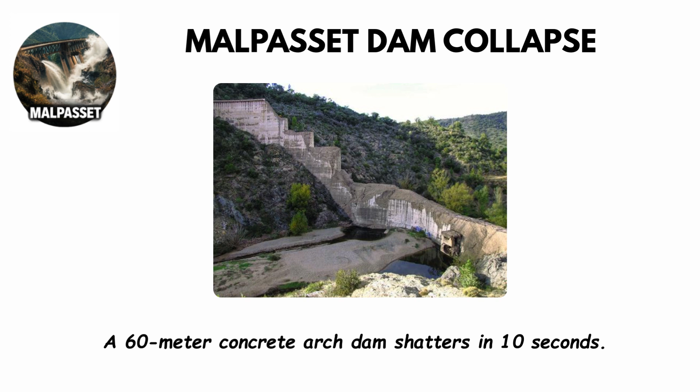The Malpasset Dam Collapse. December 2nd, 1959, southern France, 9:14 p.m. A 60-meter concrete arch dam shatters in 10 seconds. 50 million cubic meters of water explodes down the Reyran Valley at 70 kilometers per hour. The wave is 40 meters high, taller than a 13-story building.

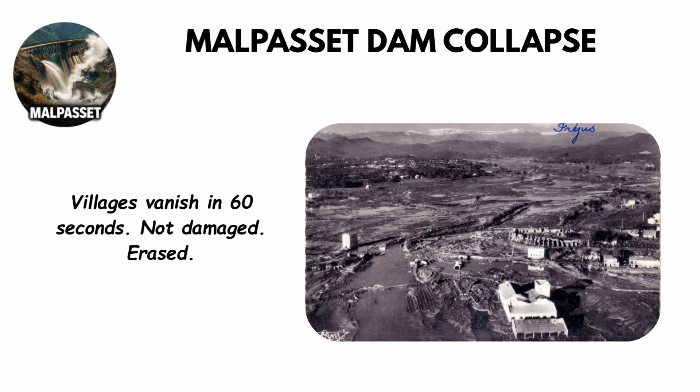Villages vanish in 60 seconds. Not damaged, erased. 423 people killed, 135 of them children. Many drowned in their beds, never knowing what hit them. The brutal twist? The dam's concrete was flawless. Engineers built a perfect structure on fractured gneiss rock riddled with faults.

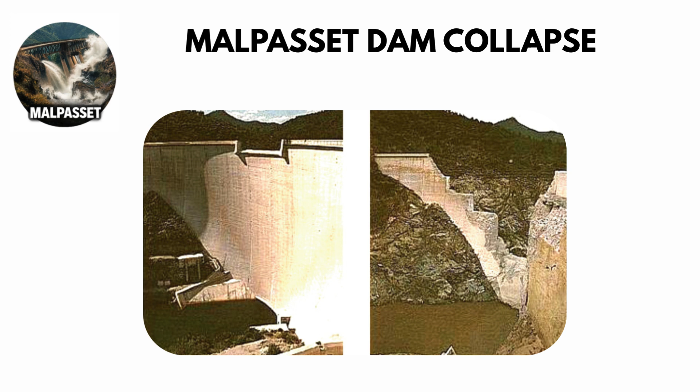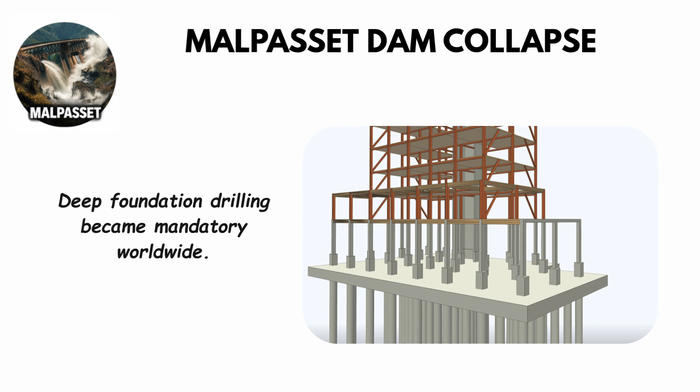Foundation investigation, inadequate. Geological surveys, superficial. Water pressure built beneath the base like a hydraulic jack until physics won. The dam worked beautifully, the geology didn't. After Malpasset, the rules changed forever. Deep foundation drilling became mandatory worldwide. Hundreds of test boreholes before 1 kilogram of concrete. The lesson? Perfect engineering on bad ground equals mass disaster.

The Vajont Mega Tsunami. October 9, 1963. Northern Italy, 10:41 p.m. 260 million cubic meters of mountain, Mount Toc, slides into a reservoir in 45 seconds. That's 350 times the volume of the Great Pyramid. Impact speed? Over 100 kilometers per hour. The water doesn't splash, it detonates. A megatsunami shoots 250 meters straight up, higher than a 70-story building.

The wave splits in two. One destroys villages upstream. The other, carrying 30 million cubic meters, surges over the 261-meter dam. Downstream, the wall of water is 140 meters high. Longarone, population 1,910, sits directly in its path. 10:43 p.m., the town exists. 10:47 p.m., it's gone. 4 minutes. Only 500 bodies recovered, the rest simply vanished. Total death toll, nearly 2,000 people.

The dam? Still standing today, completely intact, not even cracked. Engineers knew the mountain was moving, 3.5 centimeters per day for 3 years. They thought they could control it by lowering water levels. They tried to stop 260 million tons with a drainage valve. The investigation revealed fraud, ignored warnings, suppressed geological data. Vajont redefined engineering responsibility forever. You're not building a structure, you're redesigning an entire geological system. Ignore the environment, and physics sends the invoice written in lives.

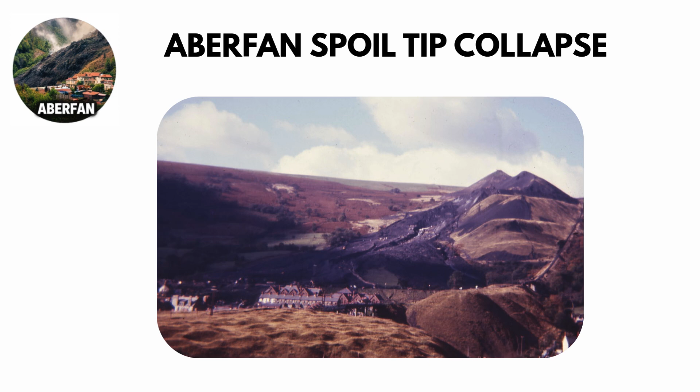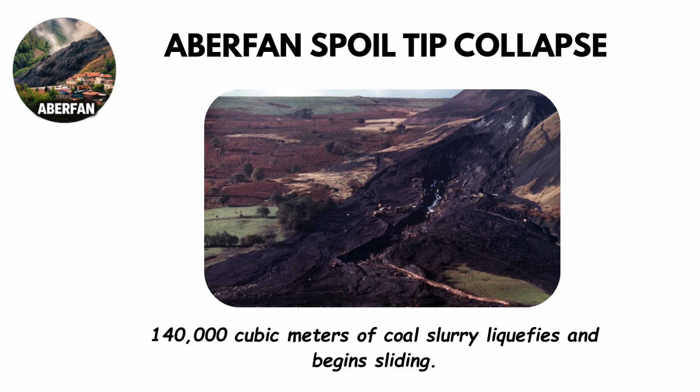The Aberfan Spoil Tip Collapse. October 21st, 1966, Wales, 9:15 a.m. Tip number 7. A 111-meter mountain of coal mining waste sits above Pantglas Junior School, built directly over underground springs, swollen with 2 weeks of rain. 140,000 cubic meters of coal slurry liquefies and begins sliding. Speed, 40 kilometers per hour down the hillside.

At 9:17 a.m., 2 minutes after movement starts, it hits the school. A 5-story wave of black sludge smashes through the rear wall. Classrooms fill instantly. Children buried under 12 meters of waste. Miners, many of them fathers, dig with bare hands. 28 children pulled out alive in the first hours. After that, hope dies with every hour that passes. Final count? 144 dead, 116 of them children aged 7 to 10.

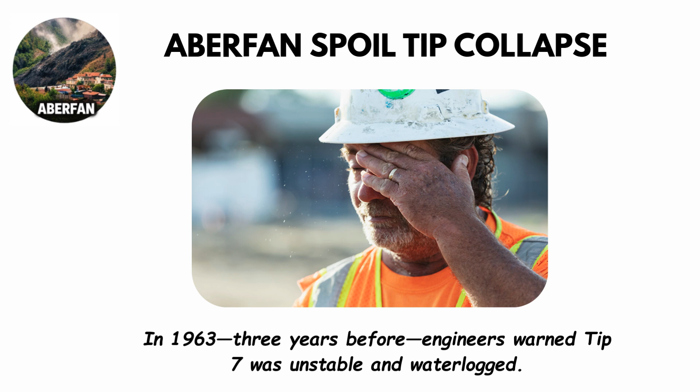This wasn't an accident, it was documented negligence. In 1963, 3 years before, engineers warned Tip 7 was unstable and waterlogged. Recommendation: stop using it immediately. Action taken? None. Coal production continued, the tip grew higher. Warnings ignored. Aberfan forced Britain to overhaul mining waste regulations completely. It established a legal principle. Ignoring known hazards isn't negligence, it's culpability. The 116 children are buried together in 2 long rows. They were learning arithmetic that morning.

They never went home. Turkish Airlines Flight 981, March 3, 1974, 12:40 p.m. Flight 981 climbs through 11,500 feet after leaving Paris. 346 people aboard. Destination, London. Then the rear cargo door, improperly latched due to a design flaw, blows out. Explosive decompression at 500 miles per hour. The cabin floor collapses downward, severing 6 critical flight control cables beneath it.

Pilots lose control of elevators, rudder, engines, everything, in 2 seconds. The aircraft pitches into a 20-degree nose-down dive. Speed, 800 kilometers per hour. Trajectory, uncontrollable spiral. At 12:41:50, just 77 seconds after door failure, it slams into Ermenonville Forest. Impact so violent the largest intact debris piece is 4 meters long. 0 survivors. 346 people dead.

Here's the nightmare. This exact failure happened before. 2 years earlier, American Airlines Flight 96 had the same door blow out. They landed safely. Investigators found the design flaw, recommended mandatory fixes for all DC-10s. McDonnell Douglas issued a suggestion, not a requirement. Airlines could ignore it. Turkish Airlines did. Modification cost, $10,000 per aircraft. Cost per life saved, $28.

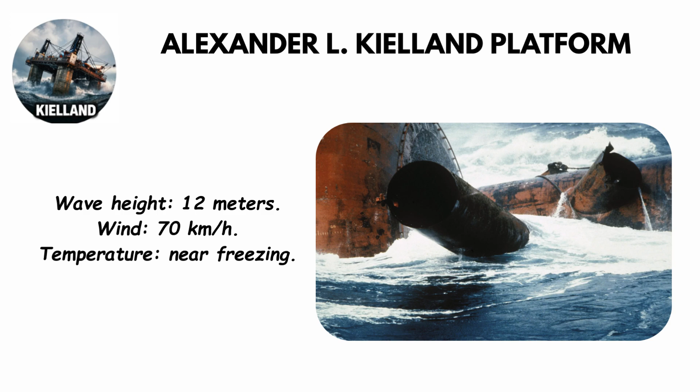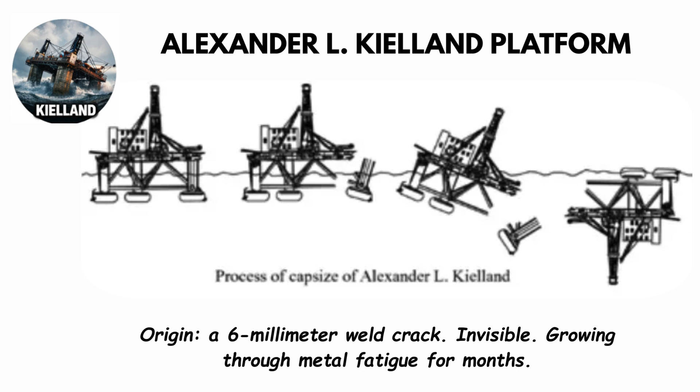The Alexander L. Kielland platform capsized, March 27, 1980, North Sea, 6:27 p.m. 212 oil workers on a 5-legged semi-submersible platform, 320 kilometers offshore. Wave height, 12 meters. Wind, 70 kilometers per hour. Temperature, near freezing. A diagonal support brace, 6 meters long, several tons, suddenly fractures and breaks off. Origin, a 6 millimeter weld crack, invisible, growing through metal fatigue for months.

Platform tilts 30 degrees in 15 seconds. Anchor cables snap. Tilt accelerates, 35 degrees, 40 degrees, 45 degrees. At 6:30 p.m., 3 minutes after initial failure, the platform capsizes completely. Workers trapped inside, now underwater in pitch darkness. Of 8 lifeboats, only 1 deploys successfully.

Others jam or crush. Survivors jump from 40 meters into 2 degrees Celsius water. Hypothermia window, 15 minutes. 123 people killed. 89 survived. The crack started at a small welded sonar mount on the brace.

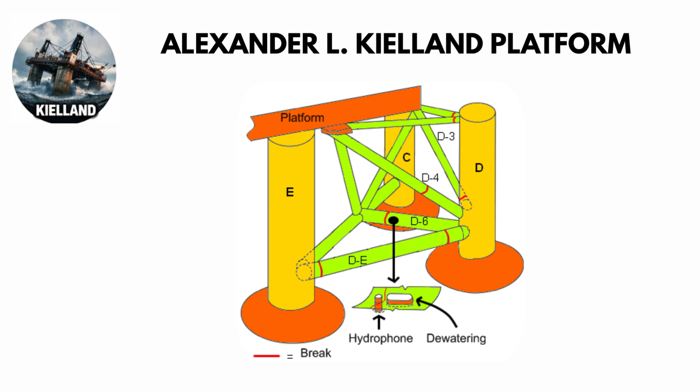Kielland transformed offshore engineering. Fatigue analysis, mandatory. Weld quality standards, completely overhauled. Damage tolerance, design requirement, not afterthought. In harsh environments, invisible damage is always growing. If you can't inspect it, you can't trust it.

The Val di Stava tailings dam collapse. July 19, 1985, northern Italy, morning. 2 earth dams above Stava village store mining waste, mud, sand, water. Raised higher and higher for years without proper reinforcement. Drainage, inadequate. Monitoring, minimal. Warnings, ignored.

The upper dam fails. Released slurry hits the lower dam seconds later. Both collapse simultaneously, unleashing a fast-moving wall of mud and debris. Speed, racing down the narrow valley like an avalanche. Everything in its path, homes, hotels, bridges, obliterated. 268 people killed. An entire community ceases to exist in minutes.

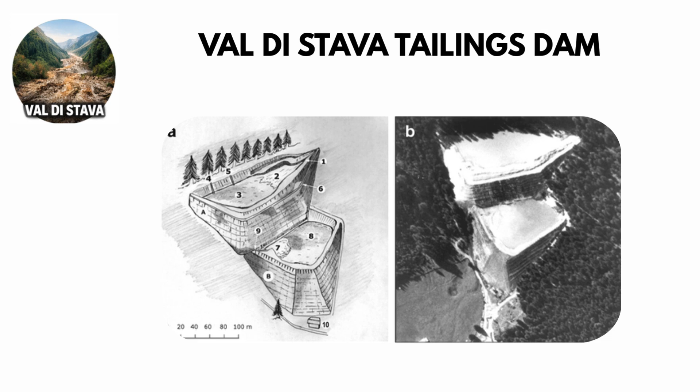This wasn't a freak accident. It was chronic regulatory failure, poor design geometry, 0 independent oversight, years of warning signs dismissed. Val di Stava became one of the world's most studied tailings disasters. It proved these structures aren't passive. They're living systems demanding constant control. Raise them without engineering discipline, and they become weapons.

The Chernobyl reactor explosion. April 26, 1986. 1:23 a.m. Chernobyl nuclear power plant, Ukraine. Operators attempt a safety test under unstable reactor conditions. Design flaws combine with procedural violations. Power surge goes critical. The reactor explodes. The core destroyed. Graphite fire burns for days.

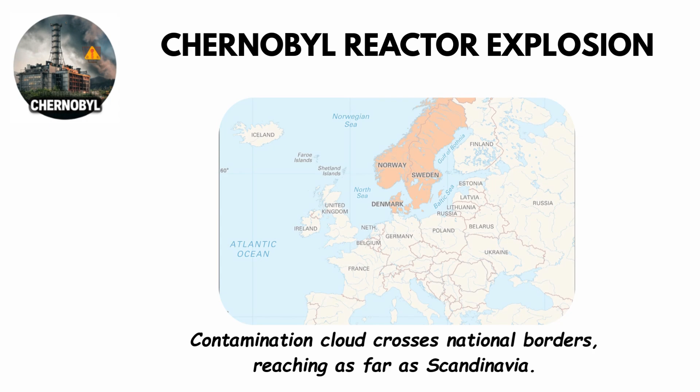Massive radioactive release spreads across Ukraine, Belarus, much of Europe. Contamination cloud crosses national borders, reaching as far as Scandinavia. Firefighters rush in without understanding the lethal radiation. Many absorb fatal doses within hours. Nearby residents not warned immediately. Evacuation comes too late for thousands.

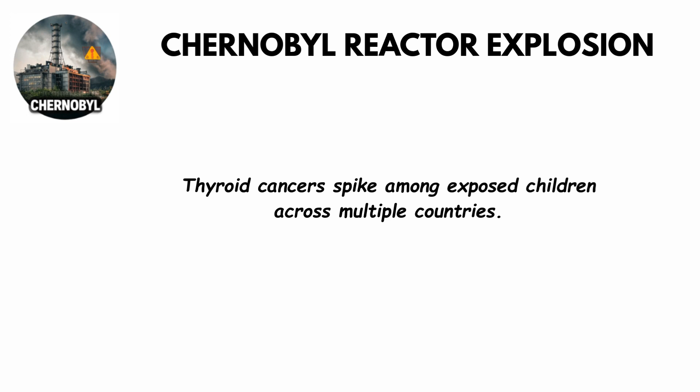Short-term deaths, dozens. Long-term health effects, thousands. Thyroid cancers spike among exposed children across multiple countries. Chernobyl wasn't a single failure, it was systemic collapse, design vulnerability, operational pressure, weak safety culture, secrecy, all converging at once.

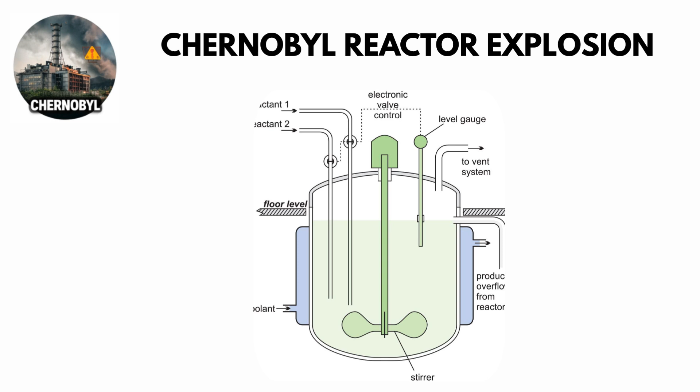The disaster transformed nuclear engineering worldwide. Reactor designs fundamentally altered, safety culture revolutionized, international nuclear standards completely rewritten. It proved complex systems fail catastrophically when transparency is suppressed, and radiation doesn't respect borders, politics, or lies.

The Piper Alpha Platform Disaster, July 6, 1988, North Sea, 10 p.m. Piper Alpha, an oil production platform, is undergoing routine maintenance, a safety valve removed from a condensate pump, work unfinished by shift change, communication breakdown, the night crew doesn't know. They restart the pump, pressurized gas escapes.

First explosion ignites fires so intense they melt structural steel. Pipelines rupture, feeding more fuel directly into the inferno. Emergency systems fail. Escape routes cut off. Workers face a choice, burn alive or jump 50 meters into the sea. Many jump from heights that make survival impossible.

By morning, 167 dead. Investigation reveals systematic safety management collapse. Poor communication, flawed permit-to-work systems, platform design that allowed fire to overwhelm critical systems within minutes.

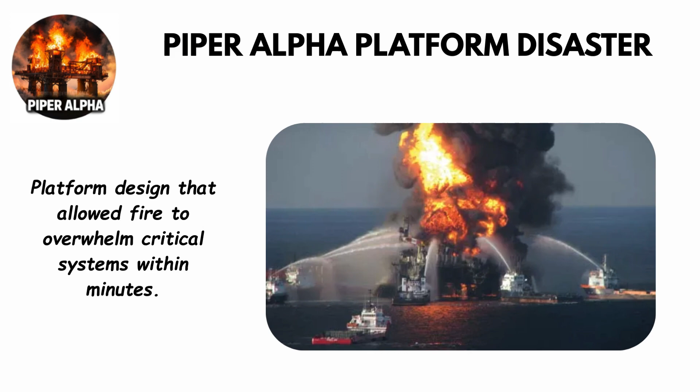Piper Alpha permanently transformed offshore safety regulation. Hazard management became priority one. Production speed became secondary. It proved that paperwork errors can become physics when explosive energy is involved. A missing permit note, a conversation not had. 167 people dead.

The sinking of the MS Estonia, September 28, 1994, 1 a.m., Baltic Sea. MS Estonia, a roll-on, roll-off ferry, crosses rough seas en route to Stockholm. Loud impacts heard from the bow. The bow visor fails under wave loads. It wasn't designed to withstand forces it was experiencing.

Water floods the vehicle deck rapidly through the open bow door. The ship develops a severe list and capsizes within an hour. Passengers trapped below deck in darkness, freezing water, violent weather. 852 people die. It's one of Europe's worst maritime disasters.

The failure revealed fundamental design vulnerability in ro-ro ferries. Once water enters the vehicle deck, free surface effect destroys stability instantly. Capsizing becomes inevitable. Structural weaknesses compounded the problem.

Estonia forced sweeping changes in passenger ship safety across Europe. New stability requirements, bow door locking systems redesigned, evacuation procedures completely overhauled. It remains a brutal reminder. Ship design that looks safe on paper can kill hundreds when physics takes over.

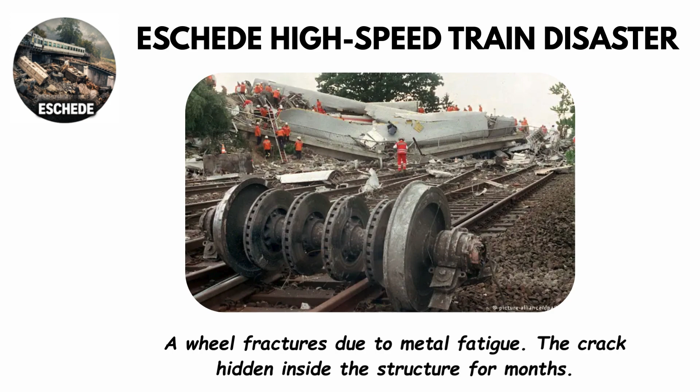The Eschede high-speed train disaster, June 3, 1998, northern Germany. Speed, 200 kilometers per hour. ICE high-speed train racing through the countryside. A wheel fractures due to metal fatigue. The crack hidden inside the structure for months. At full speed, the wheel disintegrates.

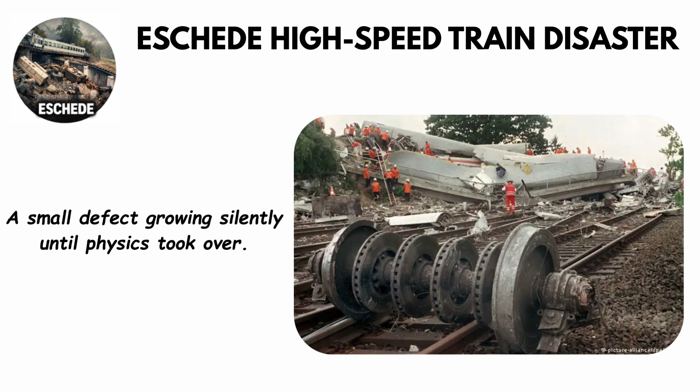Train derails and slams into a concrete overpass at 200 kilometers per hour. The bridge collapses onto the passenger cars below, crushing them instantly. 101 people killed, dozens severely injured. This wasn't a collision. It was fatigue failure, a small defect growing silently until physics took over. No warning, no time to react.

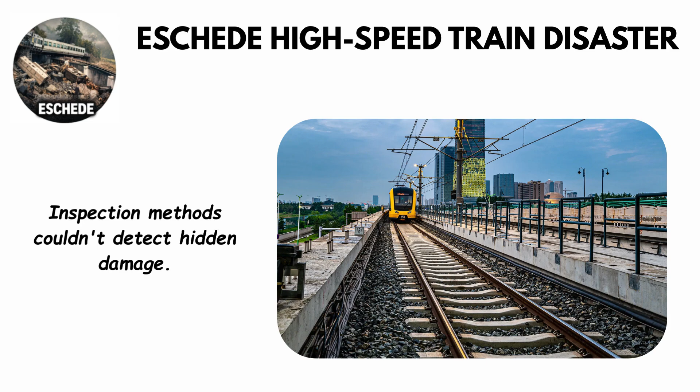Eschede exposed critical limitations in early high-speed rail systems. Inspection methods couldn't detect hidden damage. Engineers underestimated how quickly defects progress at extreme speeds. The disaster transformed rail engineering across Europe. Wheels completely redesigned. New monitoring systems deployed. Inspection regimes made far more rigorous. At 200 kilometers per hour, small errors leave zero margin. Fatigue doesn't announce itself. It just kills.

The Mont Blanc Tunnel Fire, March 24, 1999. Deep beneath the Alps, a truck catches fire inside the Mont Blanc road tunnel. Vehicle fire escalates into a tunnel-wide inferno within minutes. Smoke fills the confined space. Temperatures exceed 1,000 degrees Celsius. Drivers trapped behind the burning truck have nowhere to escape.

Ventilation systems struggle. Communication fails. Rescue teams blocked for hours. 39 people die, most from smoke inhalation, not flames. The tunnel itself became the death trap. Limited fire compartmentation, inadequate emergency refuges, ventilation not designed for modern fire loads.

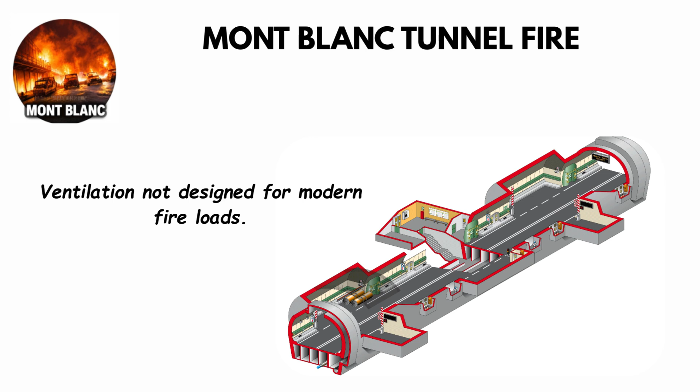Mont Blanc forced a complete rethink of tunnel safety across Europe. New standards for fire detection, ventilation control, emergency response. Emergency exits spaced closer. Fireproof refuges mandatory. Underground infrastructure offers no forgiveness. In a tunnel, smoke doesn't just kill, it hunts.

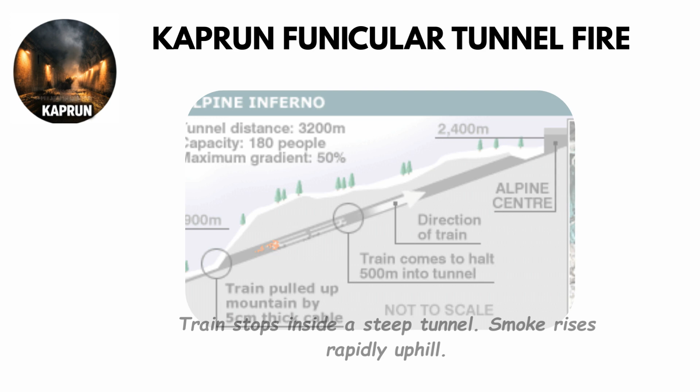The Kaprun Funicular Tunnel Fire, November 11, 2000, Kitzsteinhorn Mountain, Austria. A funicular railway catches fire shortly after leaving the station. Train stops inside a steep tunnel. Smoke rises rapidly uphill. The tunnel acts like a chimney, pulling smoke upward at deadly speed. Passengers flee upward, directly into the smoke.

Visibility drops to zero within minutes. Oxygen vanishes. 155 people die, most within 500 meters of where they started. The failure was design, not just fire. Materials unsuitable for tunnel conditions. Emergency exits inadequate. Evacuation planning fundamentally flawed.

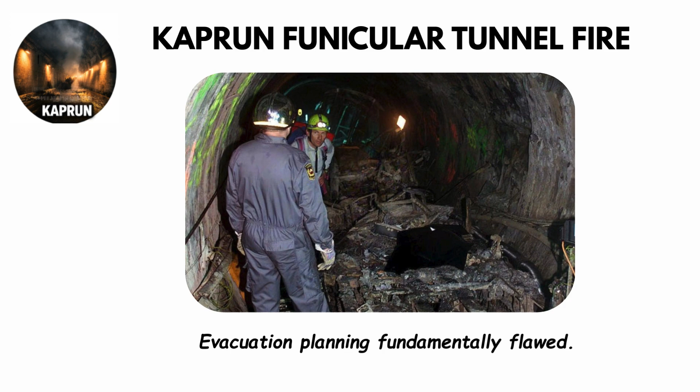Survivors who went downhill, against instinct, into darkness, lived. Those who went uphill, following the light, died. Kaprun reshaped safety standards for cable railways worldwide. It stands as brutal proof. In confined spaces, smoke, not fire, decides who survives. Human instinct says go up toward light and air. In a tunnel fire, instinct kills you.

The Grenfell Tower Fire, June 14, 2017, London, 1 a.m. A small kitchen fire breaks out in a high-rise apartment tower. Under normal circumstances, it should remain contained to one unit. Instead, flames reach the exterior cladding. Combustible panels and insulation allow fire to race vertically. The building's facade becomes a highway for flames, entire tower engulfed within minutes.

Smoke and heat trap residents inside their homes. Many followed official advice: stay put and wait for rescue. For those on upper floors, that advice became a death sentence. 72 people killed. This wasn't a firefighting failure, it was design, regulation, and oversight failure.

Cost-cutting decisions replaced fire-resistant cladding with combustible materials, materials testing inadequate, regulatory enforcement weak, safety warnings from previous fires ignored. A single apartment fire became a whole building catastrophe because saving money mattered more than saving lives.

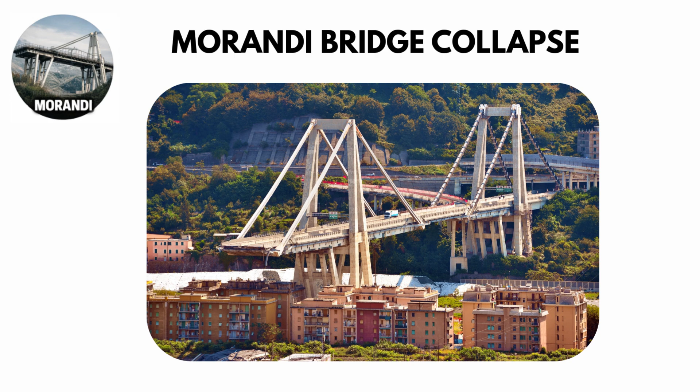The Morandi Bridge Collapse, August 14, 2018, Genoa, Italy. Storm conditions. The Morandi Bridge, a major highway structure, suddenly collapses. A central span gives way without warning, dropping vehicles into the void. 43 people killed in seconds. The bridge had been deteriorating for decades.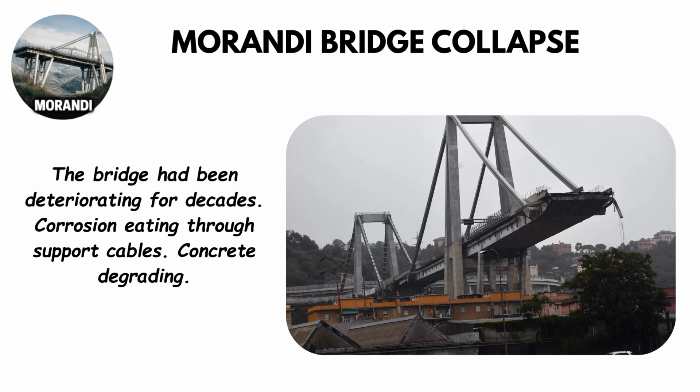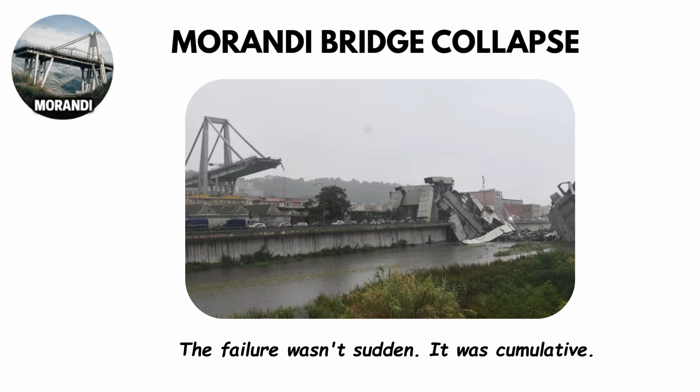Corrosion eating through support cables, concrete degrading. Design made inspection difficult. Maintenance deferred repeatedly. Concerns raised for years. Action taken, minimal. The failure wasn't sudden. It was cumulative. Decades of neglect, material degradation, unresolved design challenges, all converging into a single moment when structural capacity reached zero.

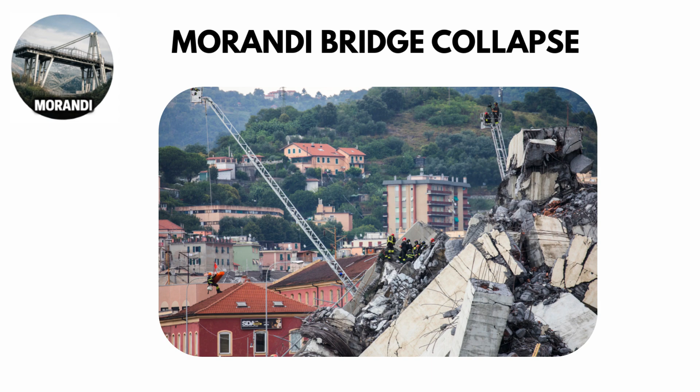Morandi triggered nationwide infrastructure scrutiny, governments forced to confront the cost of deferred maintenance, the hidden debt of aging structures across Europe. It stands as a symbol. Infrastructure doesn't fail overnight, it sends warnings for years. The collapse is just the announcement.

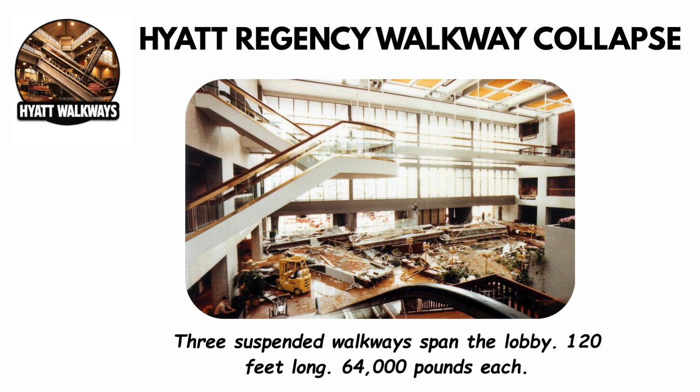The Hyatt Regency Walkway Collapse, July 17, 1981, Kansas City, Missouri, 7:05 p.m. 1,600 guests packed the Hyatt Regency Hotel atrium for a Friday night tea dance. 3 suspended walkways span the lobby, 120 feet long, 64,000 pounds each. The 4th floor walkway's box beam connection fails. It drops onto the 2nd floor walkway beneath it.

Both collapse simultaneously onto the crowded dance floor. Impact time, 2 seconds, 114 dead, 216 injured, the deadliest structural collapse in U.S. history at the time. The cause, a catastrophic design change. The steel fabricator switched from continuous ceiling rods to a 2-rod system. The 4th floor walkway now carried double the load. The engineering firm approved the change without calculations.

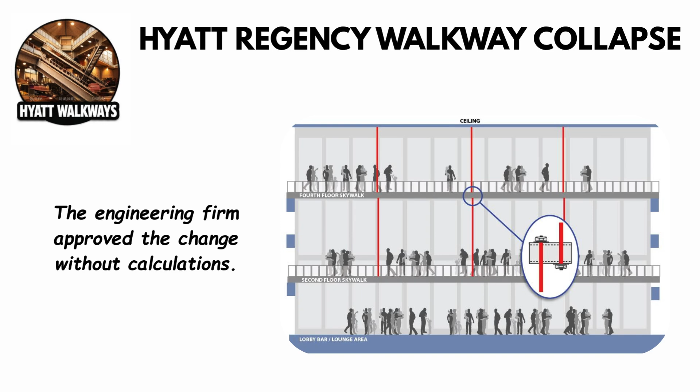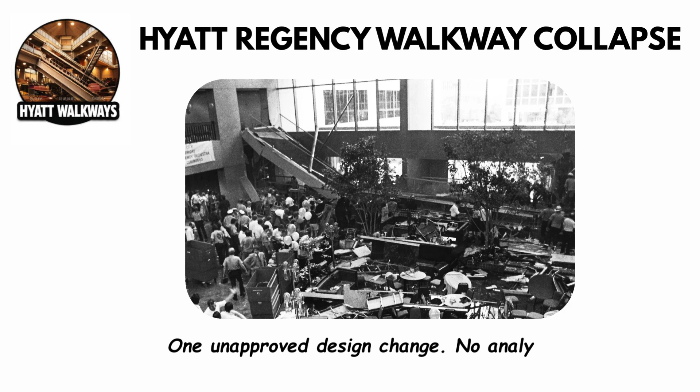The National Bureau of Standards confirmed: even the original design only met 60% of building code requirements. The walkways would have failed under 1/3 of the weight they held. Engineers lost licenses. Firms bankrupted. Standards revolutionized. One unapproved design change. No analysis. 114 dead in 2 seconds.

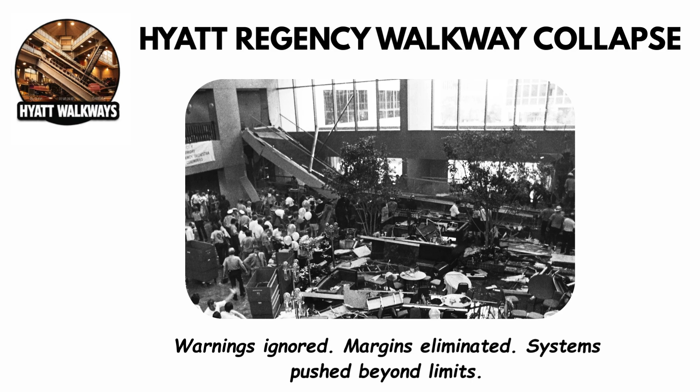Across dams, tunnels, reactors, trains, towers, and bridges, the pattern never changes. These failures weren't inevitable. They were engineered through human decisions. Warnings ignored. Margins eliminated, systems pushed beyond limits. When failure came, it was fast, violent, and unforgiving. Engineering doesn't fail quietly. It fails in seconds and kills in numbers.

The most catastrophic disasters in Europe teach one lesson. Safety isn't an add-on. It isn't a checkbox. It isn't a suggestion. Safety is the system. When that system breaks, history records the cost in lives, graves, and memorials. The question isn't whether the next disaster will happen. The question is whether we've learned enough to prevent it.